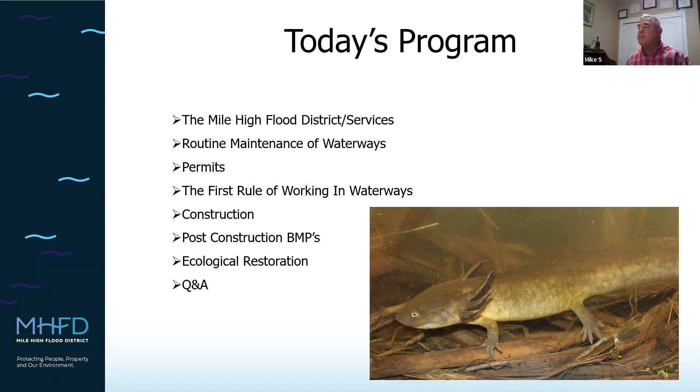We're quasi-governmental, which means that really we're kind of a privatized government organization. We don't have a public works department. We don't even own pickups or cars. We use our own. Everything that we do, we basically put out to the public. So whether that's consulting or engineering, we manage the process along with our great array of environmental and ecological consultants that we have.

And then on the construction end, we have a group of highly qualified drainage way contractors that we pay to do the projects that you see us do, whether that's picking up trash off your local waterway, doing sediment removals, or major capital construction projects into the tens of millions of dollars. That being said, we are property tax based, and all of that money, as I said, gets rebated back to the local government in the community in the form of different services.

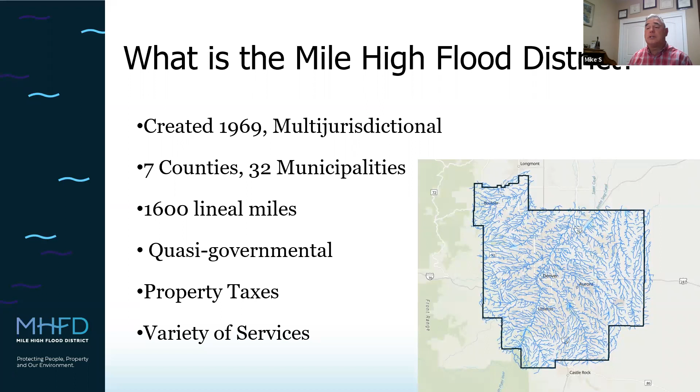I had to outline the hundreds of dollars that we spent on film processing each month, the lag in time that it took in getting photos printed, not to mention the storage space for archiving photos and the time involved in scanning them on the copier to put them into emails and documents, when I had rather thought that the benefits were kind of self-evident. So that's just a little bit about the evolution.

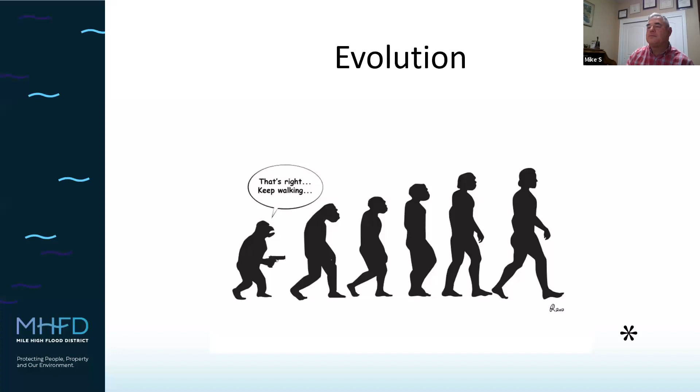So the district has been reinventing itself. As I think most people are aware, we're now the Mile High Flood District instead of the Urban Drainage and Flood Control District. We were a pretty small staff when I first started at the district. I think our total engineering construction management crew was 12 people. Today, we're somewhere around, I think, 35 or 36 people.

And basically, when we talk about a watershed, well, what's important about a watershed? Well, it's the ecological health. A healthy watershed conserves water, promotes stream flow, supports sustainable streams, rivers, lakes, and groundwater sources, enables healthy soil, and also provides habitat for wildlife and plants.

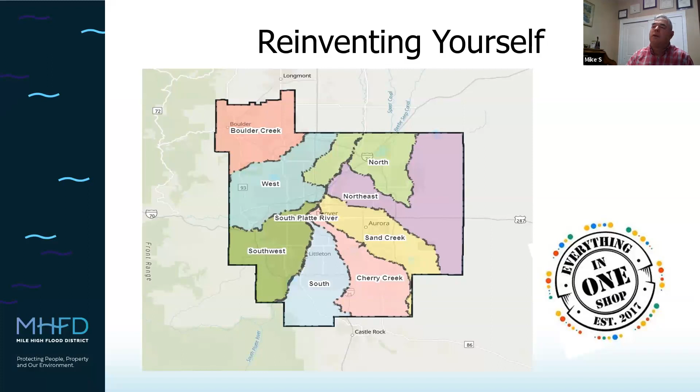Excuse me just a second.

Also wanted to let you know that very soon we'll be launching a new portal for you to connect with the district in a very real-time interactive way. So whether that's making requests for maintenance, whether it's additional debris removals, or you've seen a problem that's occurred out there, a failing structure, head wall, what have you, whether you're a consultant looking to look up mapping, you'll be able to log on, have your own account, and basically interact back and forth real time with the district staff.

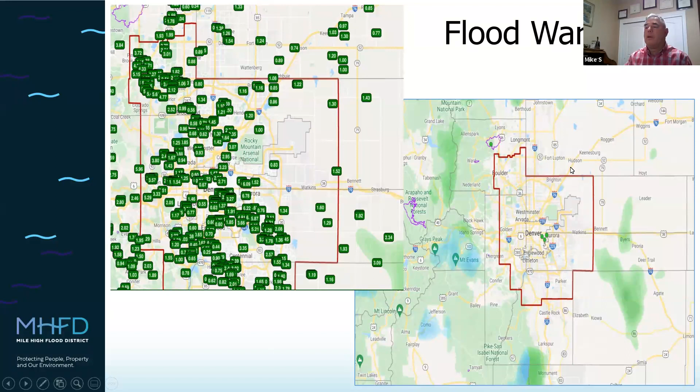The other really nice thing about this program is they continually update our criteria manuals. In addition, they help promote and evaluate our research efforts, whether it is specifically water quality based or whether we want to evaluate new types of BMPs. Currently, we have a green roof at the Denver Botanic Gardens. We have rain gardens in Lakewood. We've got sites where we've tested out porous concrete. And one interesting project that I was a part of was the construction of the Huston Lake Water Quality Treatment Forebay in Denver. More about that in just a second.

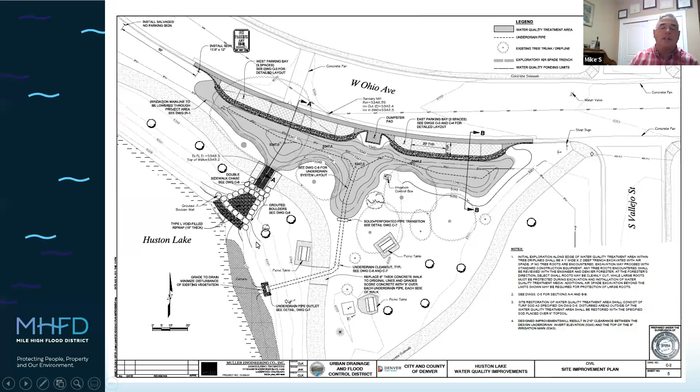So then we have our watershed management master planning. These master plans are continually updated and serve as guidance documents for communities, as well as the district's capital and maintenance construction programs. They are continuing to evolve to take into account opportunities for a wide variety of things beyond just flood control and drainage. Citizen input is a really important process of putting together any master plan. And I know that within the older community, there's a number of them, whether they're recreational or what have you.

Our waterways serve as multi-purpose corridors, for example, incorporating maintenance paths that serve the community for biking, hiking, and connecting with the great outdoors. For example, you can bike from the town of Parker to downtown Denver and beyond on the South Platte River Trail. And with the Cherry Creek Trail, you can go from basically Aurora through downtown Denver, where it ultimately connects up with the South Platte River Trail.

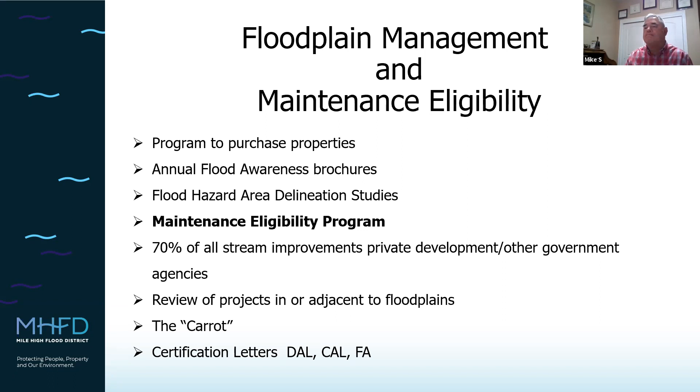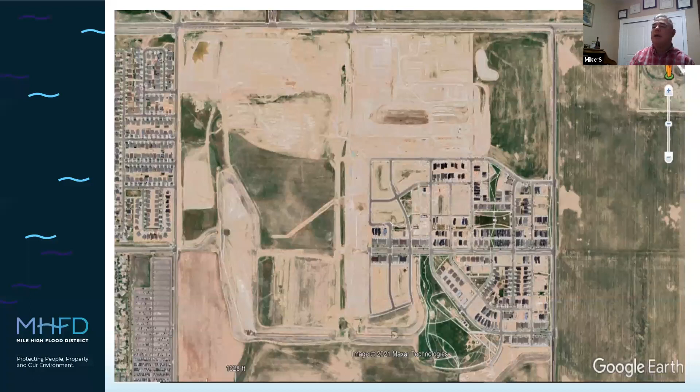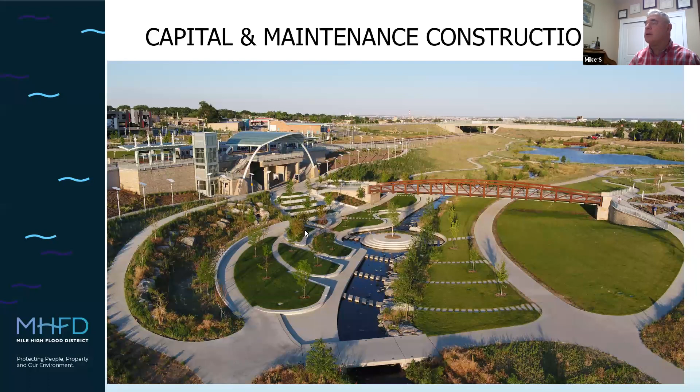So moving on, I do want to talk about the evolution of our construction program, the evolution of design and construction of stream improvements. Okay, so when I first came to the district, it really felt like the main objective was to move stormwater as quickly and efficiently as possible. And so you would see structures like this one right here.

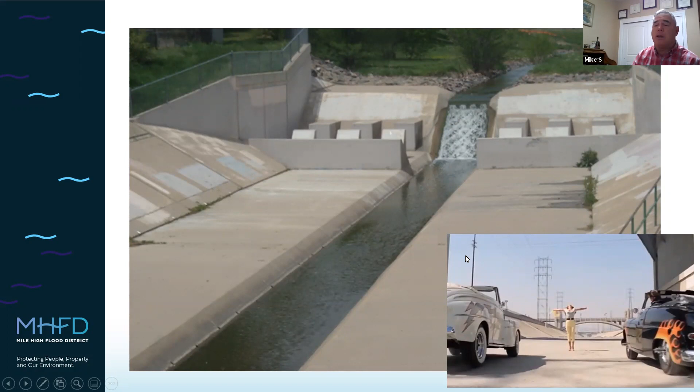And unfortunately, that's a pretty big area that I outlined to you. So again, that would be from Havana Street to Peoria Street, from I-70 north all the way to 56th Avenue. There's about 10 or 11 miles worth of this channel that runs through the residences and then through an industrial area. And where do you think it all dumps into? The Rocky Mountain Wildlife Refuge. And there it goes directly into a couple of ponds out there, and the incredible amount of litter, sediment, and just generally yucky stuff that ends up flowing down in there is just amazing. So not a huge fan. Let's leave it at that.

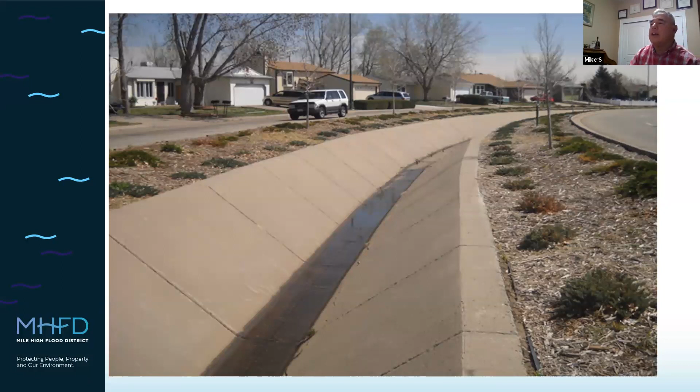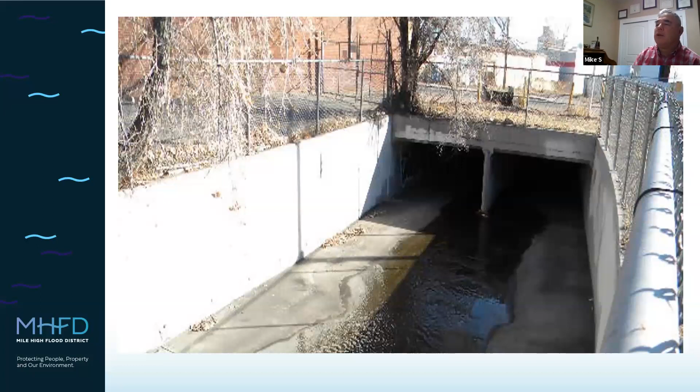So really, I think it's an approach that we wouldn't take today, but at the time, years ago, this was a pretty common method of stabilizing stream banks. One of the negative things about it is it actually ends up creating more problems downstream than it solves in the area where we did the repairs.

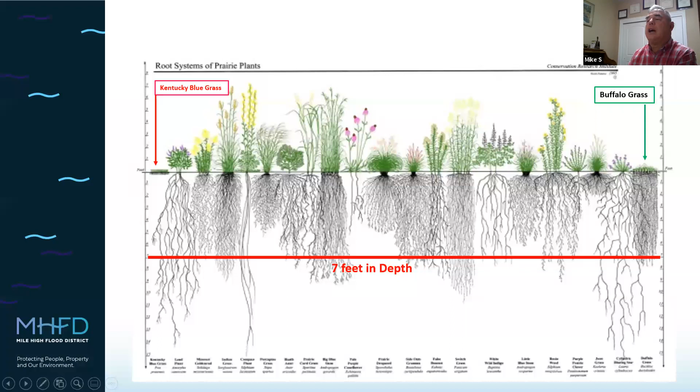What we offer our local governments is buffer mowing. So we'll mow along sidewalks. We'll mow a 3 to 5 foot path on either side, which will allow pedestrians to take a step off if a bike is coming along, or someone to walk their dog or whatever. We'll also mow along property lines to help alleviate some resident complaints, as well as fire hazards from dry vegetative material that may be up there.

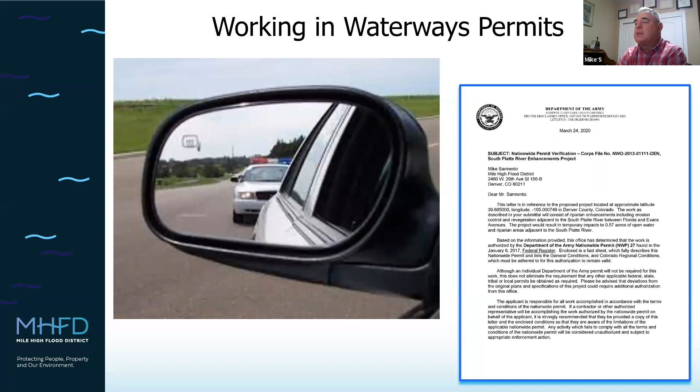We don't do a low bid process on our routine maintenance or on our construction projects. It's a process where the district, the engineer, and the contractor come together to find a mutually agreeable price. And our contractors know that if they need more BMPs to effectively maintain the site, they're not going to get gouged. It is what it is, and we pay for it. So anyway, getting back to permits, let's go ahead and move on.

So for the Corps of Engineers permit at the federal level, the district in general does the vast majority of its work under nationwide 404s. And I'm sure many of you are aware of those. Did you know that there's 52 nationwide permits out there? I can't name them all. But the three most common that we use are these three right here, 3, 7, and 13. They have very specific requirements with them.

One of them is a pre-construction notification, in which once you receive the permit, once you are going to start the work, then you notify them, let them know what's going on. We're kind of special at the district in that we have what is called a regional general permit that is very specific to us and the type of work that we do. And basically it is an expedited individual permit in between a nationwide and an individual permit. And that allows us to do a whole suite of flood control improvements.

And next on the list, we have individual permits. Those are tough, and those generally take a year to 2 years or so to get in place and up and running. It's a very intensive process. And I'd have to say, even with nationwides, I have to continually reread the permit conditions all the time, even though I've been doing this as long as I have. But it's not just me, it's our contractors. Have you given a copy to your contractor?

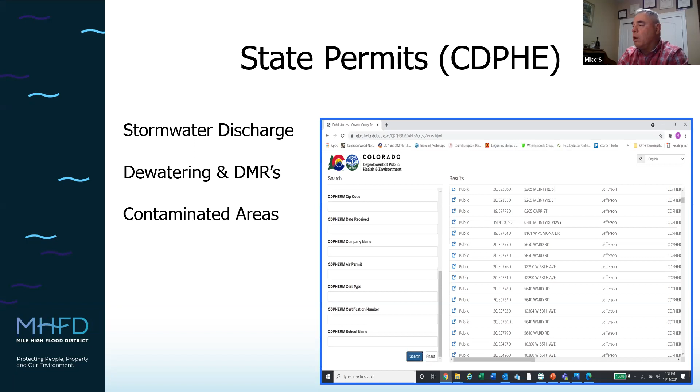So our contractors apply for stormwater management permits. They're primarily responsible for having a qualified stormwater inspector. We do hire a third-party inspection firm to double check on them. As I said before, our contractors have the capacity to modify and improve their stormwater management as they see fit out there, to make sure that we're taking care of it. We don't ding them if they ask for more erosion control blanket or log. This frees them up to focus on what they do best, hiring these water quality experts.

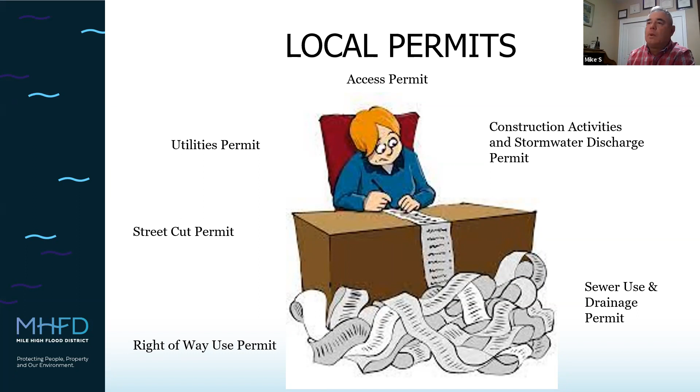One other quick thing that we do, whether it's on a routine maintenance level or with our construction contractor, is we're aware of invasive species, and not necessarily just weeds, although they're a part of it. We also deal with aquatic species too. And so our contractors have special, I want to call it treatment fluids and treatment regimes with steam, to clean their equipment, their personal boots and stuff like that, so that we don't end up transferring a problem from one stream to another as they go about their route on a daily basis. For example, in Boulder, I know that you have the New Zealand mud snail in a couple of places, and that's one that we don't want to get any more out of hand than it is.

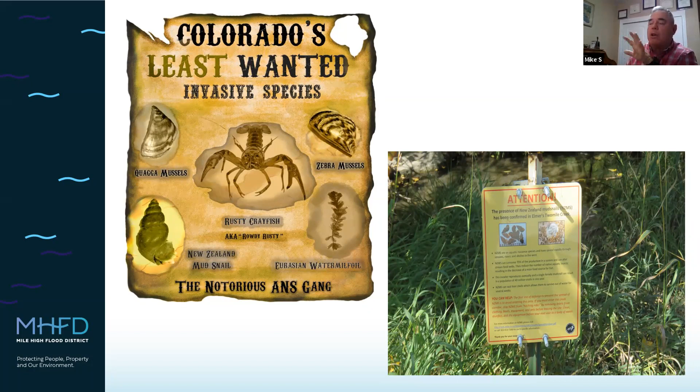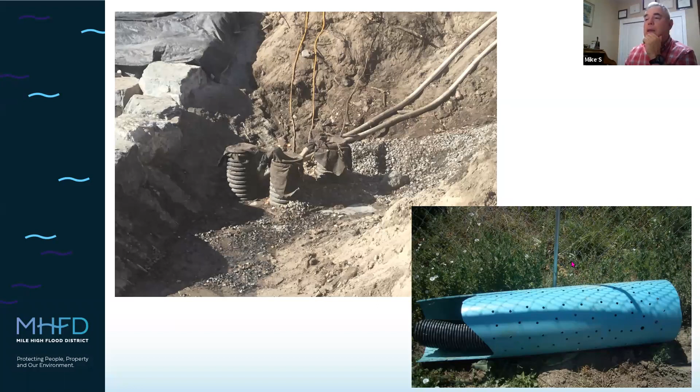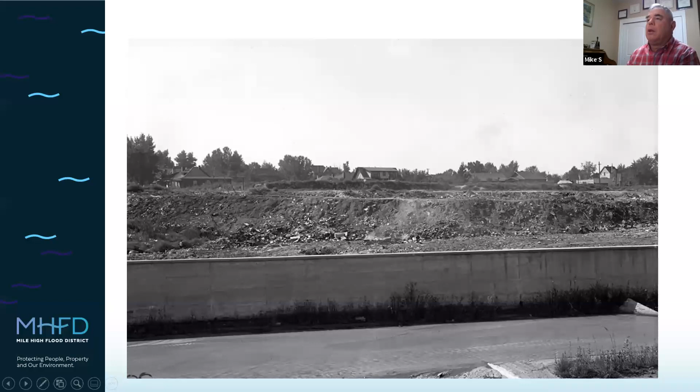So when it comes to permits, this is kind of what I'd like to leave you with. Don't be that guy. Reread your permits and then reread them again.

But this is one of the ways that we're trying to evolve the way we do major drainage improvements, with the ultimate goal of creating systems that are self-sustaining, that are self-repairing out there. And that gets back to that one photo I showed you of basically just a natural channel with wonderful floodplain connectivity, groundwater recharge, etc.

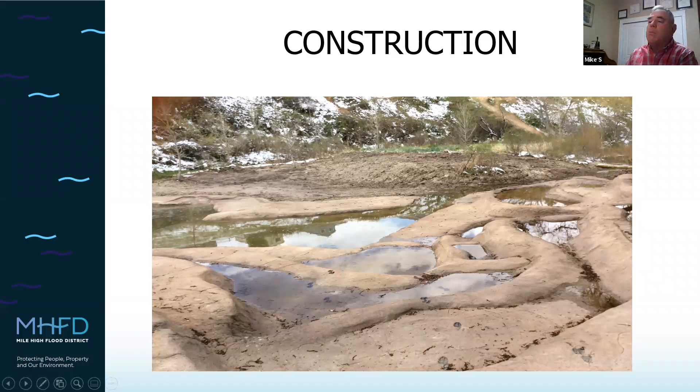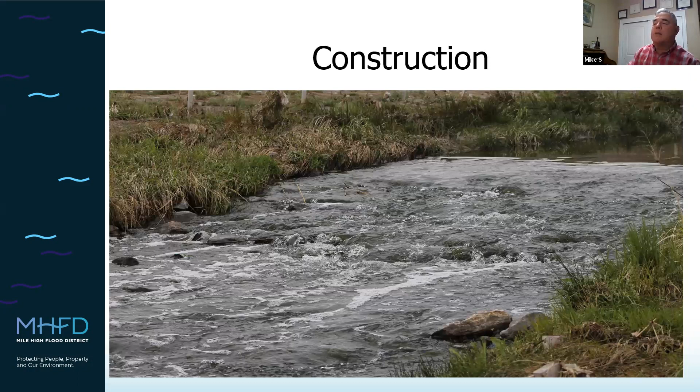And yes, you do get a little bit of migration of material, but we've come up with a system that we think really works well for us. And I'll show you that here next. It's called basically void fill riprap. And it is a mixture of different materials ranging from sand to crushed rock, 3/4 inch, to riprap, river cobble, and in situ material.

And in this particular case, it's being installed in a very sandy drainage way. In fact, the riffle drop that you saw earlier was immediately upstream of this particular one. So water is allowed to percolate completely through this. It's an awesome structure. You see the grade right here.

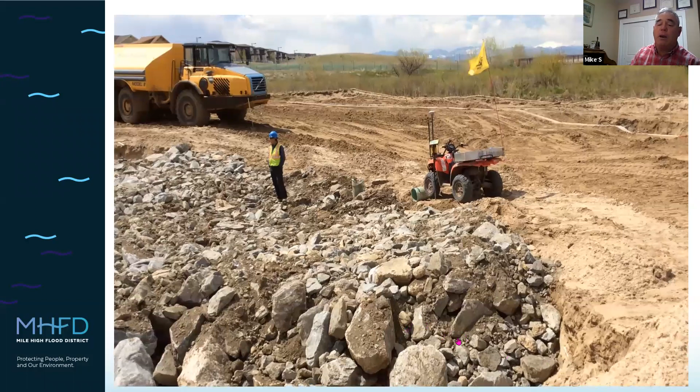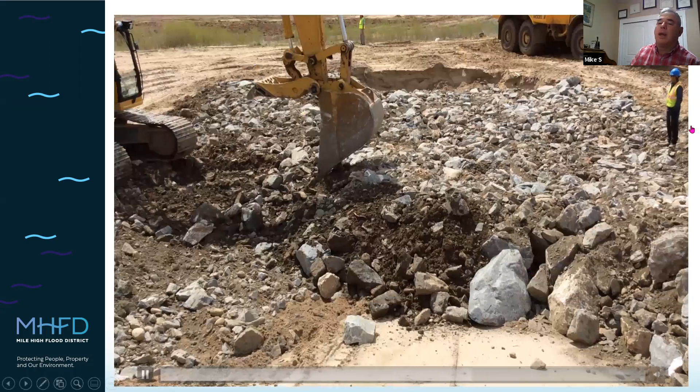And then let me just show you the structure. This is out east near DIA in a new subdivision that's being built. So this is a brand new stream system where really not much of a stream system existed before. And take a look at the size of this.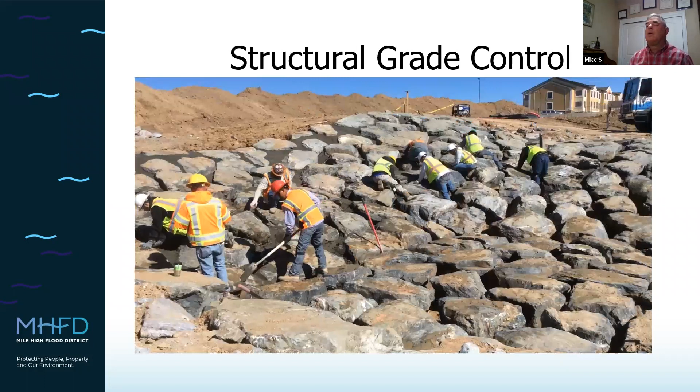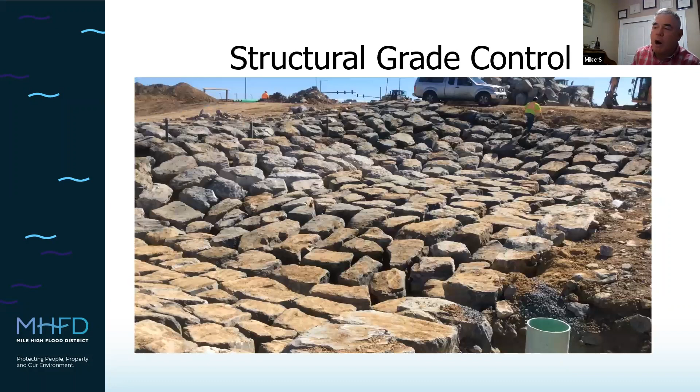So you can see the dewater sump again at the very downstream center of this structure. If you consider that a dump truck can probably haul 4 or 5 of these boulders at a time, that's a massive number of trips, not to mention how much of the mountain we had to take down to bring this rock here. And that's why I'm not a huge fan of them.

Yes, you can do things to them to pretty them up. I don't have any photos of that. Planting wells would be one. Another is we typically take the grout only halfway up the boulder, and then we install soil with vegetation in the areas behind there, so that you see very little of the boulder itself.

You see a lot more green through there. Hey, Mike, we've got a couple questions in the chat. Going back to the previous slide, how are you maintaining the mix of the soil-filled riprap, and is that mixed on site? It is mixed on site.

That's a great question. And I have to tell you that it is part science and mostly art when it comes to putting that together. The thing is you want this matrix to lock together as tightly as possible. And so it's a pinch of that and a pound of that out there. I wish I could tell you that it's a precise measurement, 1/7 of all the different materials that go into it.

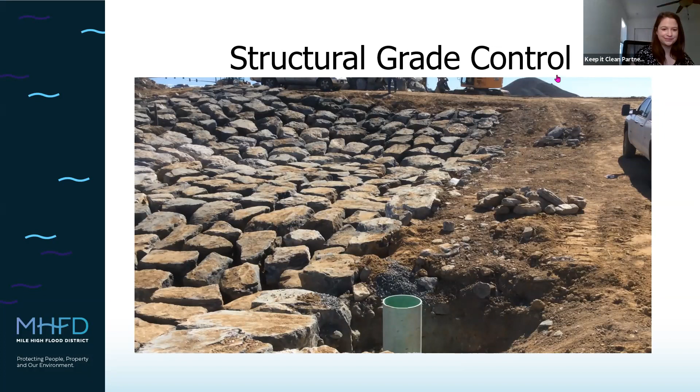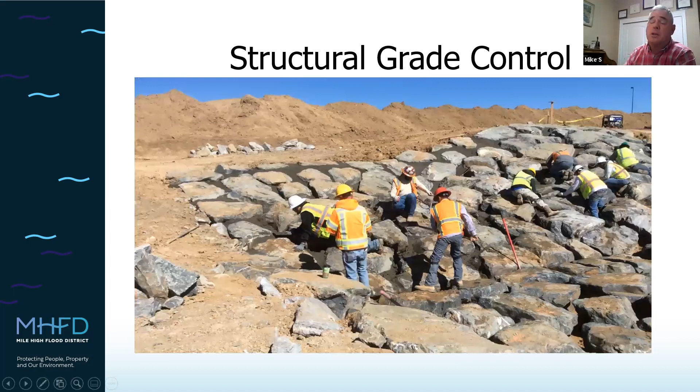Okay. So having said all that and being somewhat negative about grouted boulder drop structures, I know as a construction manager and as a pseudo engineer that you can't always not have one. And here's an example. This is up near Red Rocks amphitheater on a stream section, and it is extremely steep. It's probably a 12-foot drop in a really short distance.

It's not bad for what it is. In fact, maybe one could argue that, well, maybe it just matches all the red rock that's out there anyway. And just a real quick tour of that. All right.

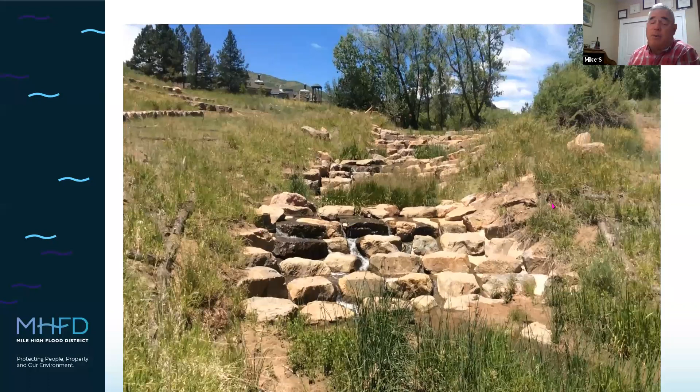I think one of the biggest lessons we learn in waterways is we don't have all the answers. The stream is going to do what it wants to do, and to try to artificially construct sinuosity and everything just doesn't work as well. Again, the stream will do what it wants to do.

So you remember at the beginning of the presentation, I said, man, I have the best job in the world. And this is the only bit of whining I'm going to do on this presentation. But over the years, I felt like I was shouting into the wind, trying to educate contractors and people about water quality or about stormwater management, BMP installation, maintenance, and stuff like that.

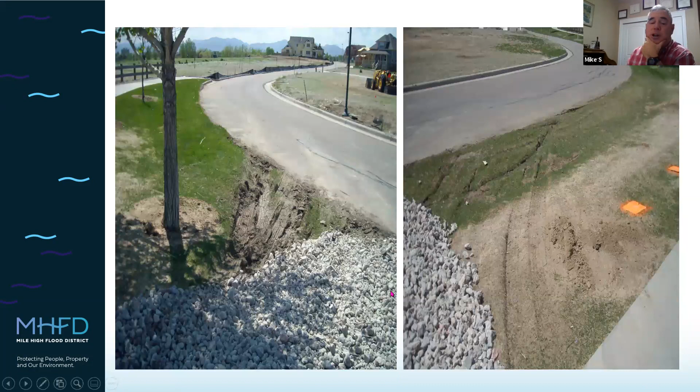And it's obvious. There's a vehicle tracking control system that's been installed here. And the trucks are shortcutting it. And not only are they hitting the root zone of this tree and destroying what good vegetation is right here, but over here on the right, you can see the same thing.

But it makes sense. I don't know too many dump trucks that can do a 90-degree turn and hit this VTC exactly head on. And so a more proactive site supervisor would have said, well, really what I need to do is I need to swing this VTC out this way and either tell them to come in one way or the other, and then fence this off, and fence off the valve boxes over here to make this work.

In fact, it would have been great if he discovered that on his own, or as I say, if you empower everybody on site, your laborers, say, hey, boss, this isn't working, let's figure this one out. And I know as a stormwater inspector, if you're driving up to the site, say you're coming in this way, and you're looking at this silt control fence, then by the time you get over here, you've already started putting a list together in your mind of things that could possibly go wrong. And it's just kind of, well, let's move on to the next one.

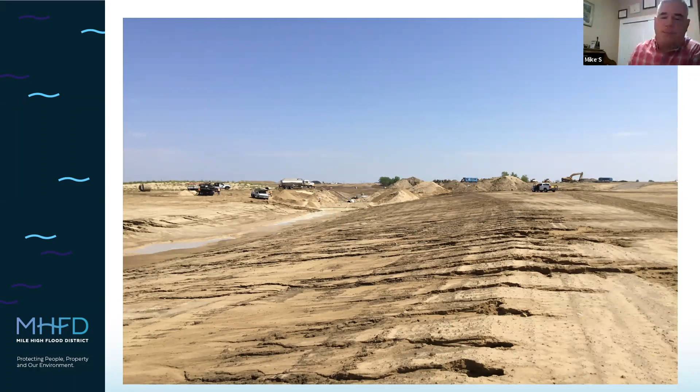But moving on. So the first rule of working in waterways is water control. Second rule is water control, always water control. On this particular one, this is in the northern part of the metro area, and the contractor, again, not a district project, is creating a brand new drainage way through here. And so his dewatering effort, so that he could work in the dry, was to build this diversion channel through here. And you can see the obvious slumping that has gone in here, the down cutting that has occurred.

And so all of this material is moving out and ends up in a wetland system right before it hits its tributary to an even bigger stream system downstream. And I'm wondering, well, where did he get his plan for a water diversion? Who approved this stormwater management plan?

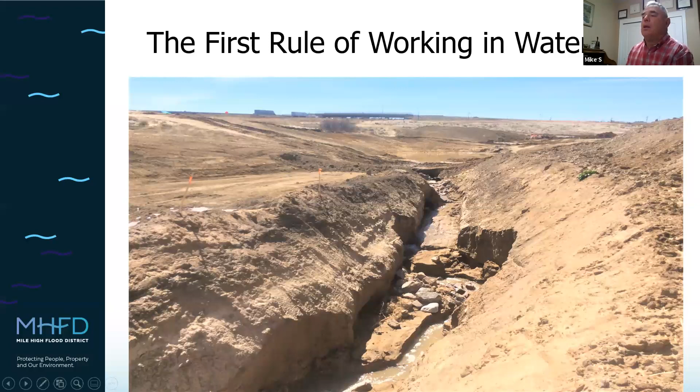All right, so then we go to this one right here, and maybe it's a little bit better. I don't think it is myself, but again, it's an unlined water diversion around a drop structure bridge crossing box culvert that's being installed over here. So they're taking the stream and diverting it around through here. Really, it's vertical surfaces that are actively eroding into the stream right here, all the way through. And then just take a little look here.

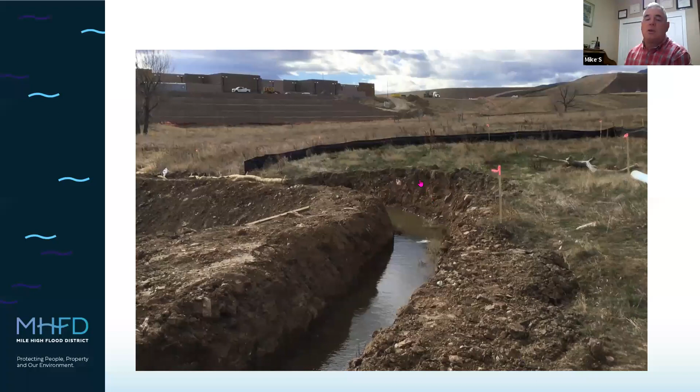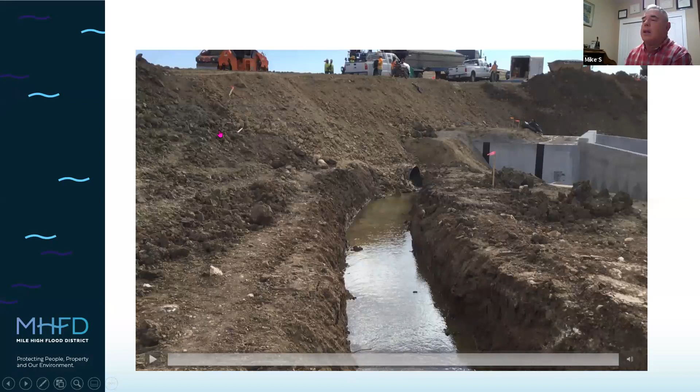And it's going directly into this pipe. It crosses the roadway directly into a wetlands area, which then directly enters another stream system through there. And again, let's just take a look at the steepness of these slopes through here. There's not a single BMP in place. And I'm wondering, this was just a couple of years ago. It's like we've had all this education, all this experience for years. Why isn't it getting where it needs to be?

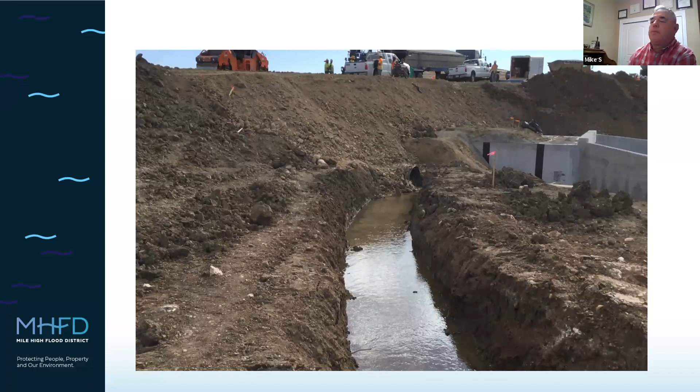So talking about water diversion, and I have seen a multitude of different types. This is one that was really unique. I thought, well, God, that's kind of cool. They've got this kind of a tube, a water tube that runs along the entire stream. They can dewater this portion of it to do their stream improvement. So yeah, that's pretty awesome.

Of course, now there's no connectivity to the air or anything. And then my concern is, well, you see these housing residents, what if somebody came over and just poked a hole in that? Man, we're in really big trouble. So maybe not the best system that we have out there.

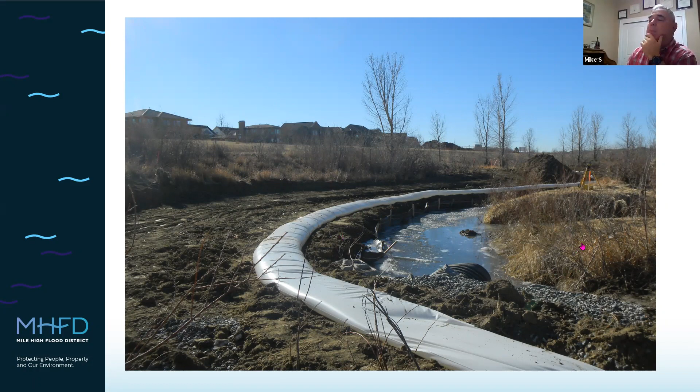So moving on, let's see here. Here's one that I think is great. They've done a really good job. They've diverted around the work site. They've lined the channel through here. They have riprap at the upstream end. And let's just play this one real quick. Again, the channel's going in down over in this area here. But I think they've done a really good job through here. And this is on Cherry Creek, which is a major stream.

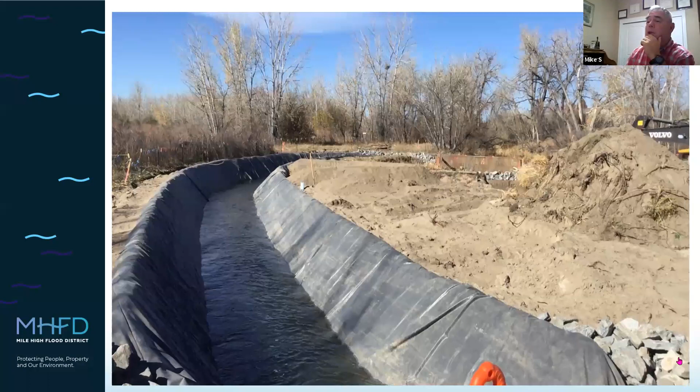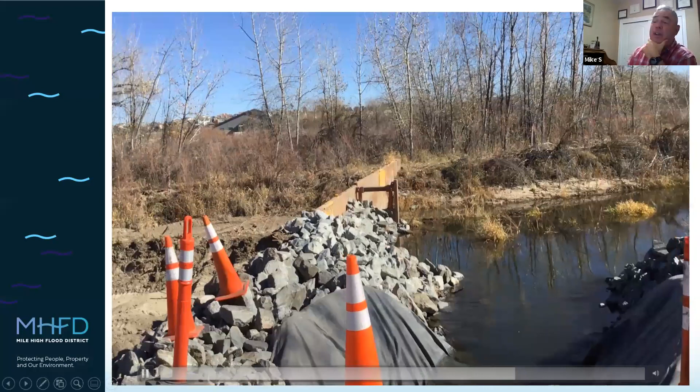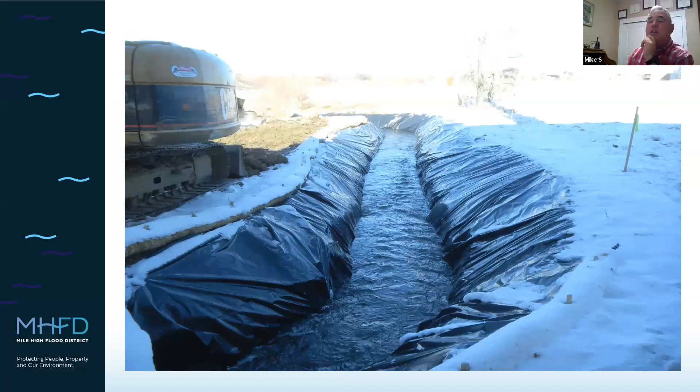All right, another example here. Really good job lining it. A heck of a flow that's going through there. Yes, it's winter, so really not a lot of opportunity for things to happen. He's installed his log along the top and staked it in. And then this is on the South Platte River, which is obviously the biggest river we have in the Front Range within the district itself.

And in this particular one, we're going to replace this. This is where we saw the deer earlier. We're going to replace this structure right here and put in a new bridge crossing for the public. And then we're going to fix the stream. We're going to do some massive stream improvements going back upstream at least 2 blocks.

So the contractor has installed a lined channel through here. He's taken into account the grade differences, installed riprap there to account for that so it doesn't erode. And then he's begun his sheet pile installation to isolate the bank stabilization work that is going to take place for about 300 feet further downstream this way. And I'll show you that real quick.

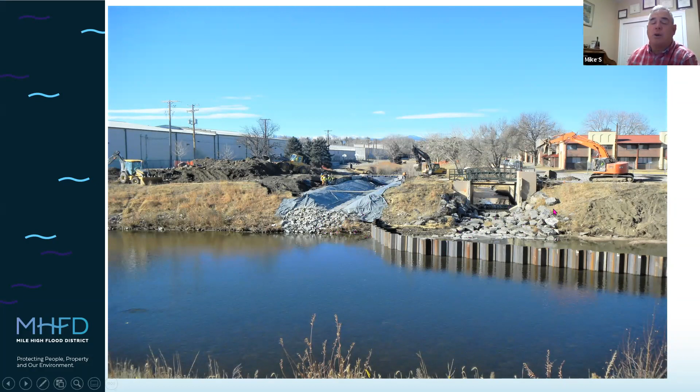And here he's got his sheet pile totally installed. This is pre-construction. We're redoing all of this bank, this bridge through here. Our water quality treatment train equipment has not showed up yet, but at that point, they'll effectively dewater this area so that the contractor can work in the dry and prevent sedimentation from occurring out in the main flow of the stream.

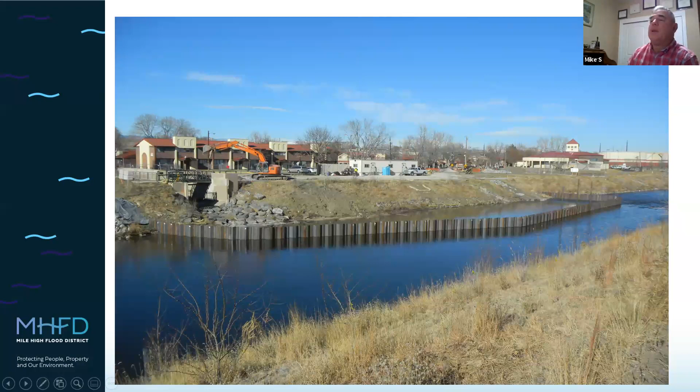Okay, almost there, guys. So let's talk about revegetation next. And that's one thing that I do love to talk about. Anytime we disturb a project, whether it's us as the city, the county, or the district, or whether there's a storm event such as the floods of 2013, it's a reset for revegetation. You saw what the root systems look like on native grasses and flowers, and many of those will grow up to 15 feet. However, that doesn't happen overnight. That takes a long time to reestablish.

Mike, before you dive into revegetation, we did get a question in the chat. Have you had any experience with turbidity curtains as the last line of defense down gradient from the work area? Not just the control. I have, and I do.

We have had projects where we've used them, and they're really good on major stream systems, and on the little ones, not so much, because you don't have that much of a water surface elevation gradient between bottom of stream and the top. But yes, we have, and it's an area that I feel that we could explore a lot more. So, work with us and see if we can't try something out. Thanks.

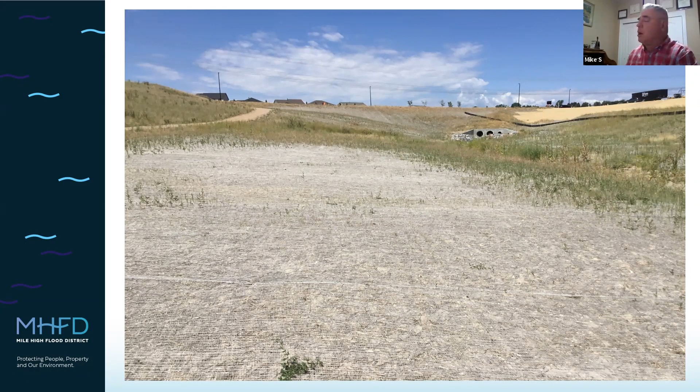And it's a do-over for the contractor. Now he's got to rip that blanket up, re-rip the soil, probably test the soil to make sure that it isn't something to do with the soils itself, and then reseed, and restart the clock all over again. And if I'm telling you it's a 1 to 3 year process to get the vegetation established and the weeds knocked back, that's a long time with a backlog of projects like that.

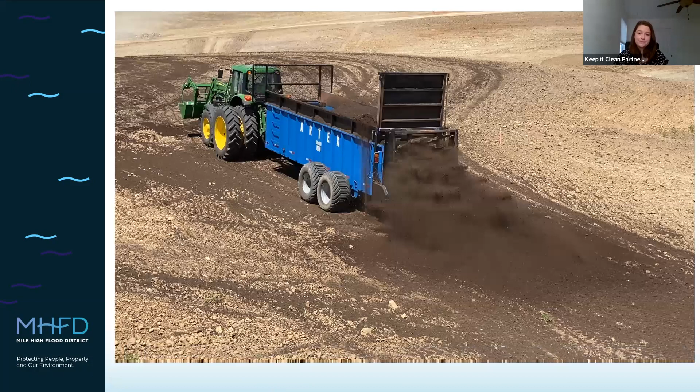Hey, Mike, we have a question about irrigating new plantings. Are you usually applying water to these new plantings? If so, how much do you usually need? Yes and no. It just depends on the circumstance. If we can partner with the local government to tap into an existing system, if it's within a green belt or whatever, we will do that. We will do what is called basically a throwaway system, where we put in the system, and then once the vegetation is established and everything's looked good, we just abandon it in place. Or we may be doing an above ground system that we can remove at a later date.

And depending on the size of the project, right now I'm working on a couple places in Boulder where we actually truck water in, and the crews water the trees and shrubs and the wetlands plants by hand with the truck. Love when we can irrigate, and I'm very thankful to the city of Boulder for providing us with a tap permit. I recommend it if you can.

However, like in this particular instance right here, the cost of irrigating would be astronomical. And so, no, this is a site that will just be left, hopefully with good site preparation and with good timing. In other words, it's not during the middle of the summer, maybe the beginning of spring or late fall. We'll get enough moisture saturation on this to where we'll do well. But who can say with the drought that we've had the last few years, right? It's a tough business, and with revegetation, rarely are things guaranteed.

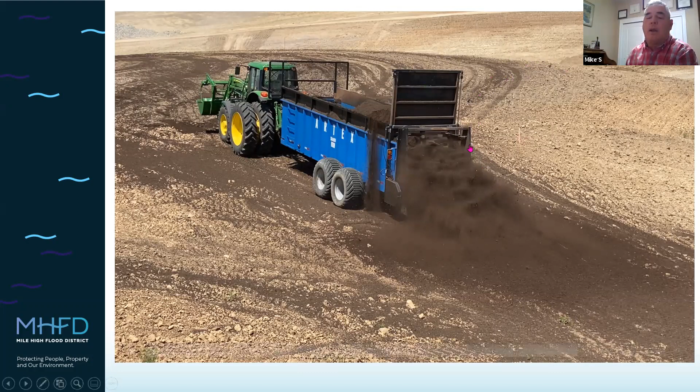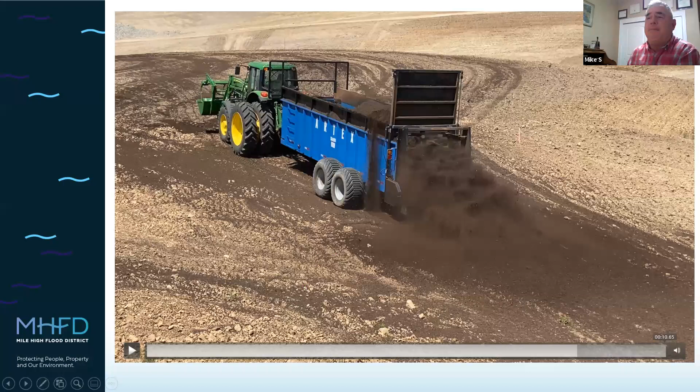Mike, how do you feel about reseeding on top of degraded blanket? Not in favor of it. And that's a good question, Christina. One of the things that we make use of is jute mesh blanketing, which actually has small spaces in there to where we can lift the blanket, shake seed in, and then let it back down. In most cases, I see just seeding on top of existing blanket like that as a failure. You need to have good seed soil contact. You need to be able to keep it in place.

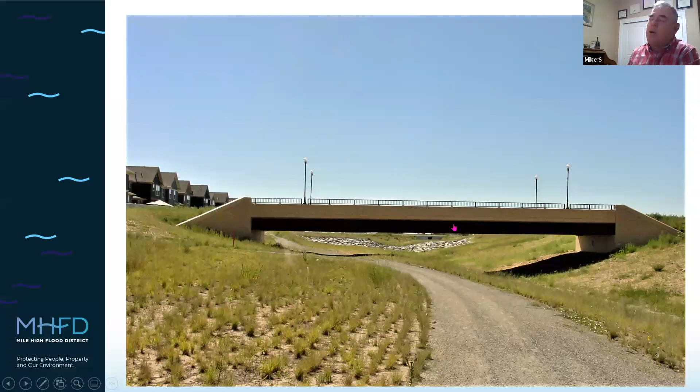And at the district, we try out a whole host of different methods. On this particular one, we have logs that have been pre-planted with wetlands vegetation to help protect that raw edge along the stream post construction, as well as wetlands mats that get installed in the upper areas. And this is, I believe, year 1.5 within the city of Denver. And overall, it's looking pretty good.

Hey, Mike, we have a couple more questions in the chat, if you don't mind. I think this was for the last slide. What time of year was that drill seed installed in the photo that you showed? It was in October. Oh, mid to late fall. Another question: do you encounter times that the blanketing used along the water edge is strangling the vegetation trying to come up, or it's not getting enough sunlight?

Absolutely. There are some erosion control blankets out there that I don't think you could stick a pin through for the most part. And we tend to discourage their use. We have several different types that we do encourage. As I said before, the jute mesh blanket, which has open spaces in it. A lot of times what we'll do is take either straw mulch or something similar and put that in between the soil and the jute mesh, to just help keep all the soil in place, but yet still allow the precipitation to infiltrate and the vegetation to come up.

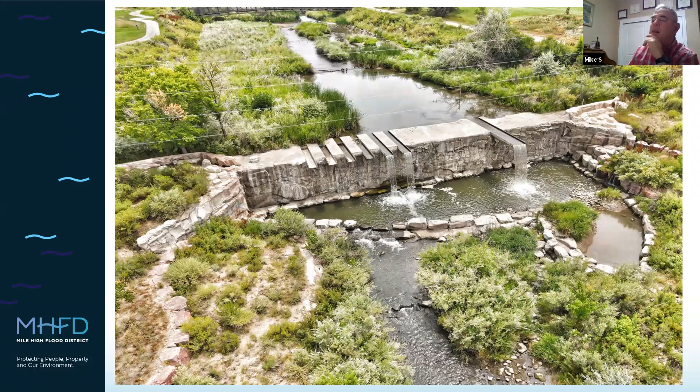This is a fish passage that we installed on a project, and it's a series of stormwater pipes that were cut in half. And then the fish were supposed to be able to migrate up the drop structure through here. Well, the bad thing is it just became a feeding trough for aquatic birds to just sit here and then just blam, eat all the minnows that were trying to go up that way.

The other was just the heat island with all this concrete and boulders here. It makes for a pretty hot system for aquatic vegetation and insects to survive. I think we can do better than doing the grouted boulder drop structures that we have.